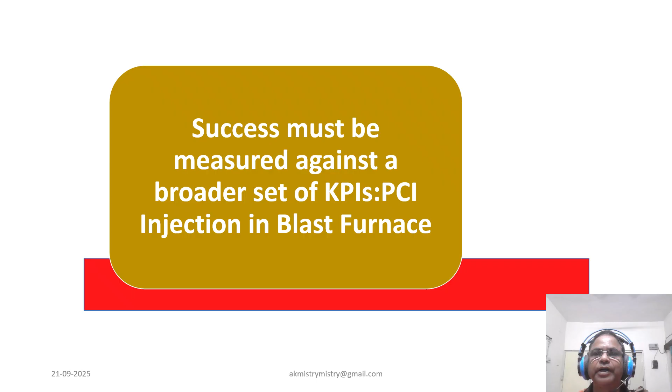Success in PCI injection is not just about pushing more coal. It must be measured against a broader set of KPIs. And what are those KPIs? Now, as you can see, the coke replacement ratio is our key economic driver. But we must also track furnace productivity, stability, and quality of hot metal and slag.

Higher ash from coal can alter slag chemistry. So, alkali removal capacity must be monitored. And this is a multi-dimensional challenge.

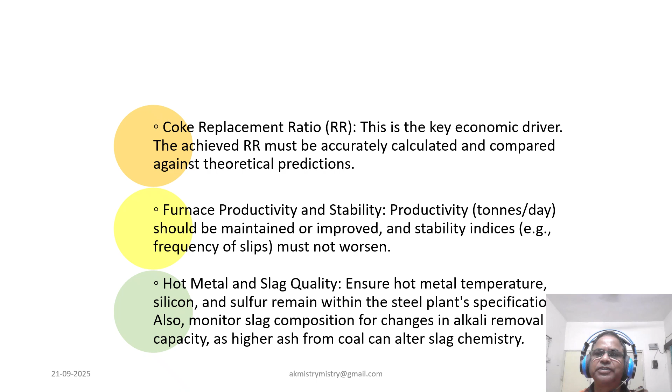Now coming to the PCI system and coal properties. As you must be knowing, a stable pneumatic conveying is non-negotiable. Pressure fluctuations reveal flow instability which can derail operation. So coal quality matters: grindability, petrography, volatile content, and all affect combustion and coke replacement in a big way.

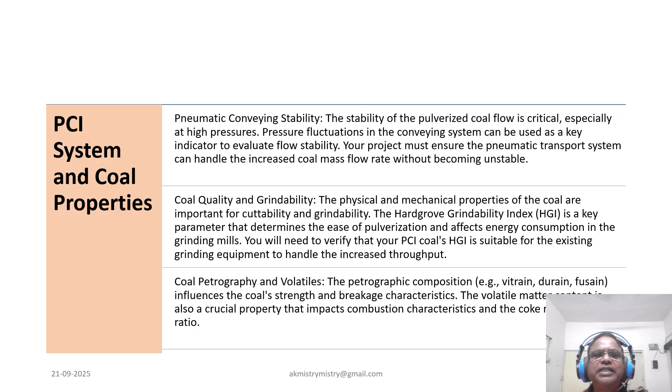The Hardgrove Grindability Index must match our mill capabilities. We are not just injecting coal, we are engineering controlled reactions.

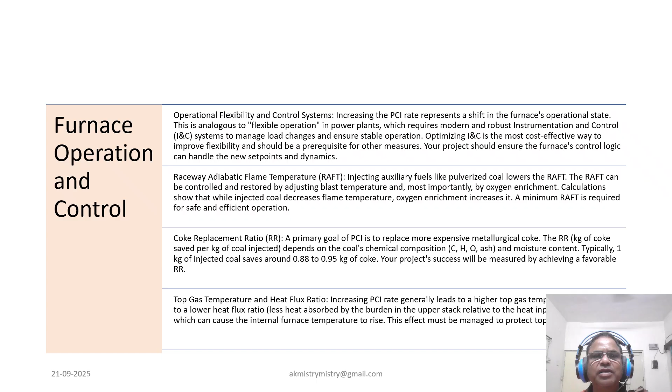So coming to raising PCI rates, we shift the furnace operation state. As we all know, like a flexible power plant, we need robust instrumentation and control systems. RAFT, adiabatic flame temperature, drops with coal injection but can be restored via oxygen enrichment. Every kg of coal injected must save coke efficiently. Top gas temperature rises with PCI, so heat flux must be managed to protect equipment.

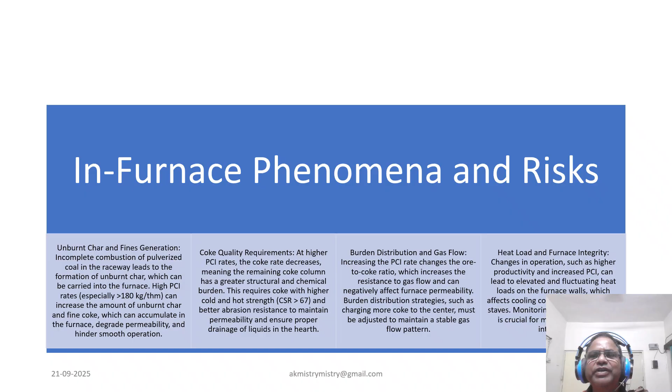Now coming to the in-furnace phenomena and risk. High PCI rates generate unburned char and fines which degrade permeability. Coke quality becomes critical; higher CSR and abrasion resistance are needed. Burden distribution must adapt to maintain gas flow, and with elevated heat load, stave temperature must be monitored to protect furnace integrity. So this is where science meets vigilance.

Now, pneumatic conveying stability, as you must be knowing, is the main lifeline of the PCI system. Stable conveying prevents tuyere blockages and ensures symmetric fuel distribution. It improves combustion efficiency and creates a controlled environment for data analysis. So, without stability, we cannot isolate the effect of PCI increase.

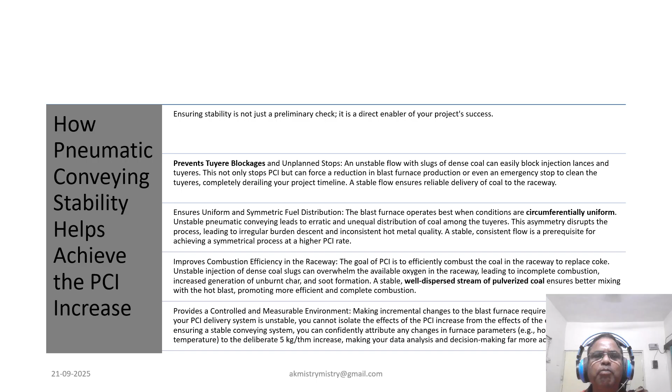So, this is the foundation before any coal reaches the raceway. The flow must be predictable and uniform, because unless it is uniform, symmetry of the furnace operation cannot be ensured.

Now coming to the flexible operation and control of PCI. We know that PCI increase is not just a fuel change, it's a shift to flexible operation that demands a control strategy capable of handling new dynamics. Faster reactions, slower burden descent, and increased thermal stress must be anticipated. So monitoring tuyere, staves, and refractory lining becomes very essential, and control logic must evolve with the process in order to combat the anticipated changes.

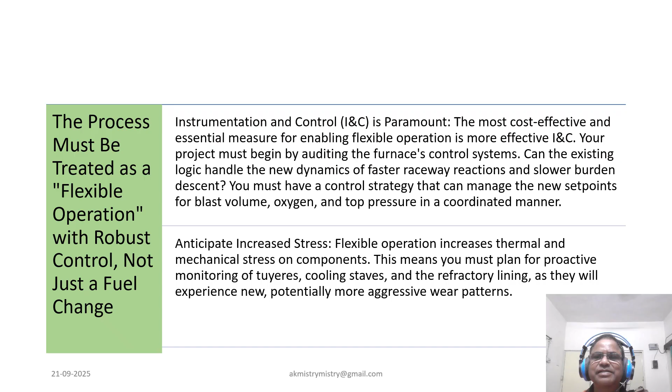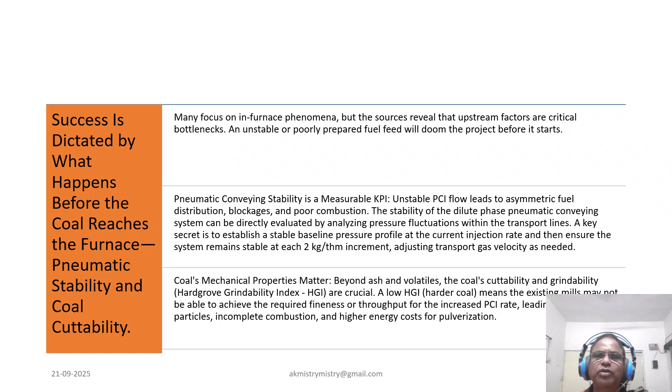So now coming to the focus on in-furnace phenomena, but upstream factors also, which are the real bottleneck. Unstable fuel feed will doom the project before it starts. So pneumatic stability is a measurable KPI. The pressure fluctuation must be tracked. Coal quality and grindability determine whether our mills can meet the increased demand or not. So this is where the success begins.

Now coming to the unburnt char and coke quality. Unburnt char is the hidden enemy. Particle size distribution governs burnout efficiency. Finer grind means better combustion. As PCI increases, coke rate drops, so remaining coke must be stronger. Weak coke breaks into fines, combining with char to choke permeability. Coke quality is not optional, it's survival.

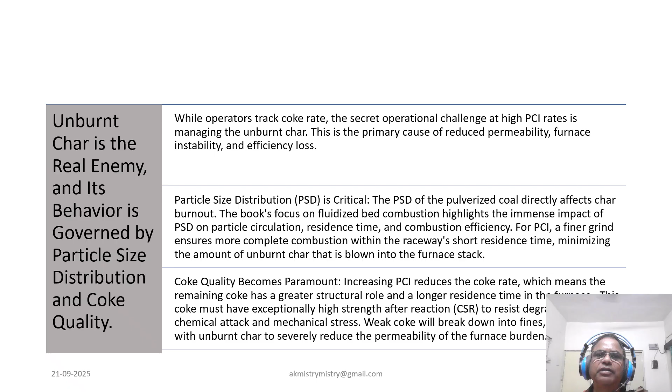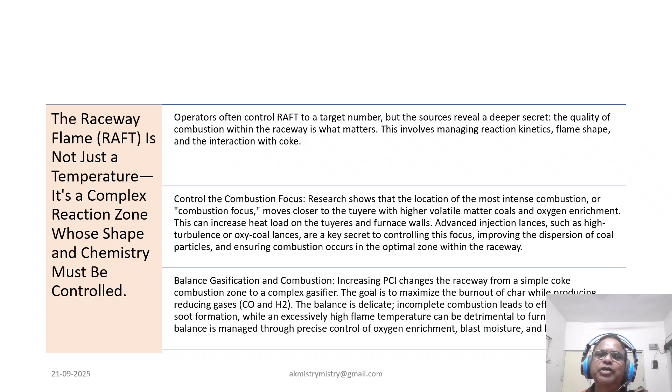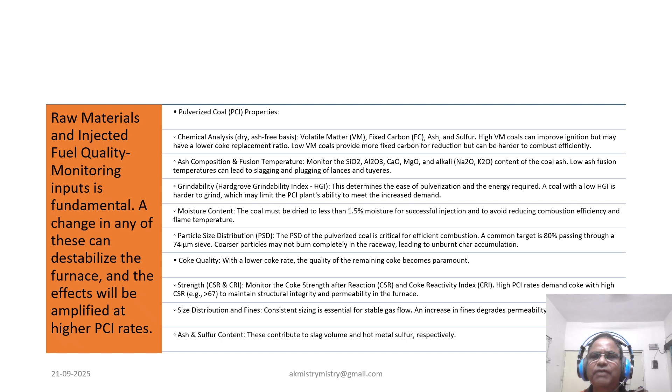As far as raw material and fuel quality is concerned, PCI coal properties, VM, FC, ash, sulfur must be optimized. As we know, ash fusion temperature affects slagging risk, and moisture must be below 1.5%. Particle size must hit 80% below 74 micron, and coke must have a high CSR and consistent sizing. Every input affects furnace stability, and effects are amplified at higher PCI rates.

Now coming to the injection and combustion system, monitoring pressure fluctuation, we have to keep a tight control to ensure conveying stability. RAFT must stay within the target. Oxygen enrichment always helps, but we need to corroborate all these with respect to tuyere temperatures. The tuyere camera detects blockages and soot. The top gas dust also reveals unburned char, and these diagnostics are our eyes and ears. So efficient combustion starts with reliable delivery and ends with complete burnout.

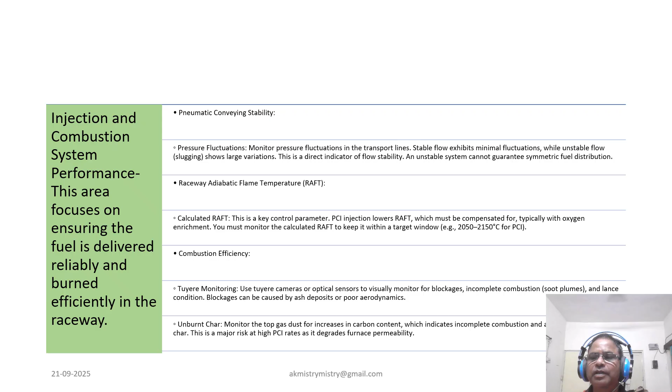So as far as furnace stability and performance is concerned, permeability and gas flow are key, and pressure drop and K factor reveal flow resistance. Thermal state is tracked via hot metal temperature and silicon, and burden descent must be smooth. We should not forget slips signal instability, and we have to keep a huge distance from such occurrences. Cooling system heat losses indicate channeling risk, and these are the vital signs of furnace health.

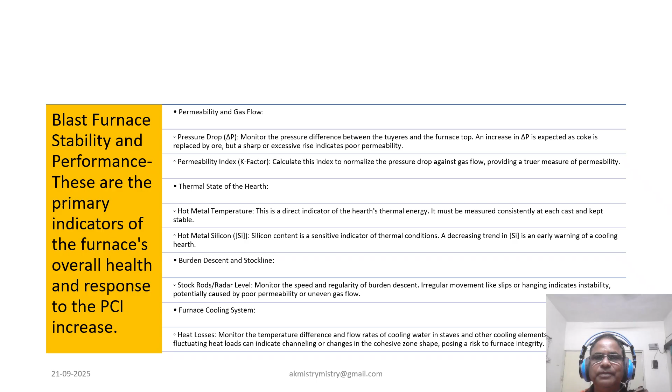Now coming to process efficiency and product quality, top gas analysis like CO, CO2, hydrogen shows reduction efficiency. Temperature must stay above dew point. Coke replacement ratio is our economic KPI. Hot metal sulfur and slag chemistry must meet specifications. PCI ash alters slag composition, so basicity must be controlled. And this is where efficiency meets metallurgy.